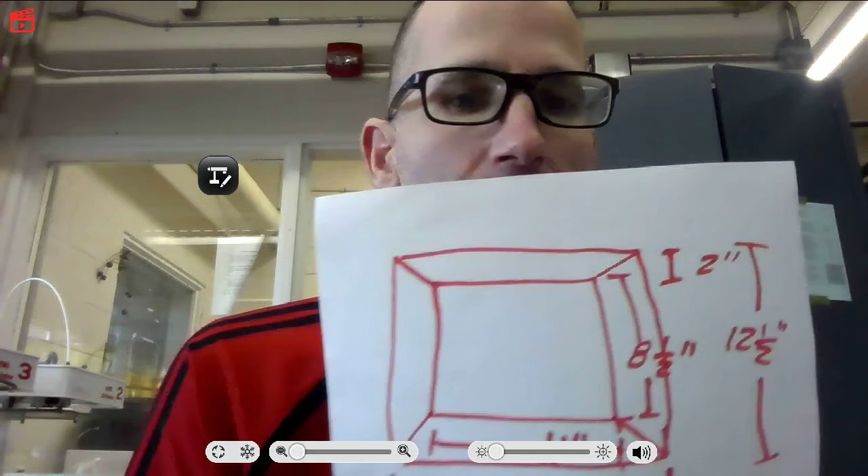Now, this picture shows you the side view of the little boards that we're going to use, and it gives you a cutout, and I want you to do that as well and show each one of these. I'll do that at the end and hold it up again for you to see, but for now, let's get to SketchUp.

Now I'm going to change my screen because I know how to do this. There we go. Cool. And I can move this somehow - oh yes, just like that. Put it over there. Okay. Oh, not that. Click, click. I don't know why this is fuzzy. It is always fuzzy. I am using HDMI, but for some reason it still isn't a good quality picture. I'm very sorry. So here we go, SketchUp.

SketchUp - once you start writing it, it does show up. You don't really need to go to SketchUp Free specifically, you can just use SketchUp. It is owned by Trimble. It is completely free. Now you go down here to SketchUp Free.

So you can see where my mouse is - I know it's hard to see. Click. Now you're going to go to Start Modeling. For me, I already have an account that I've set up with my Google email. If you've never used SketchUp before, you will have to put your email in there, and it is totally safe, it's just another extension of your Google email. So here we go, Start Modeling.

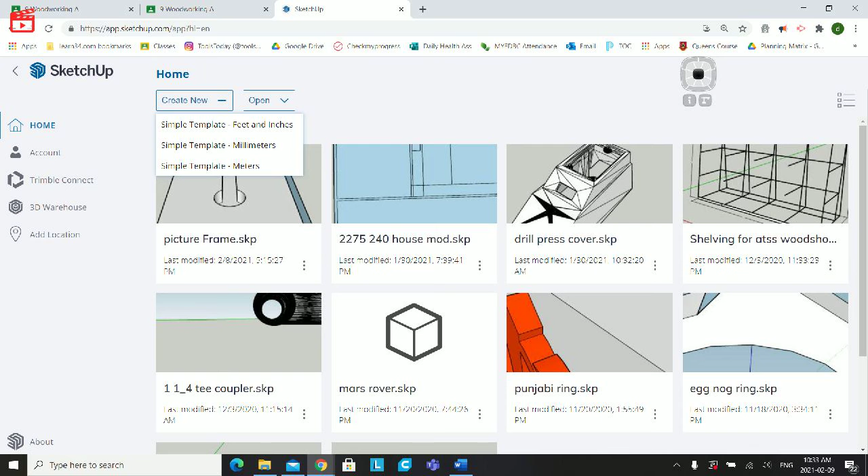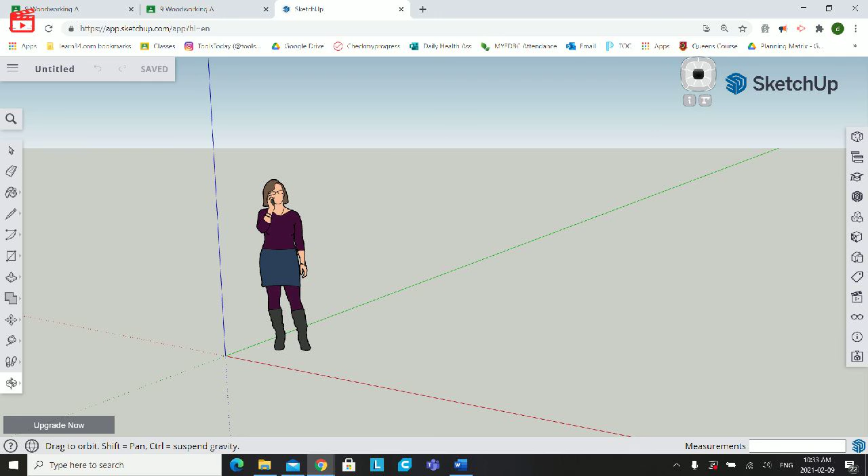All right, now we see this lady standing here. She is basically two-dimensional, but it's kind of hard to go around her because she keeps facing you. But anyway, she's unimportant really. You do sometimes like to have her in the picture though, because if you're building a house, you can see how big the house is compared to her. In our case, a picture frame is something that's relatively small, so you're going to zoom in using your mouse - you're going to use your finger and just roll in and out. So you can practice doing that now with your wheel on your mouse.

Now what I'm going to do is mess around with a few different things just so you can figure out how the options work. First off, orbit - orbit is accessed by using the letter O on your keyboard. You basically just press O and then it switches to orbit. When you're on orbit, you can press with your left mouse button, and then you can roll around and see under things, see over things, and just move them around. If you need to, you can click and roll every time, and that will allow you to roll around as well.

Now I'm going to go to just the pointer so it makes it easier for you to see what I'm pointing at. This is also a selector. This right here, we talked about this in class, is referred to as the origin. Blue is your origin - it's your Z, or your Zed if you're from Canada.

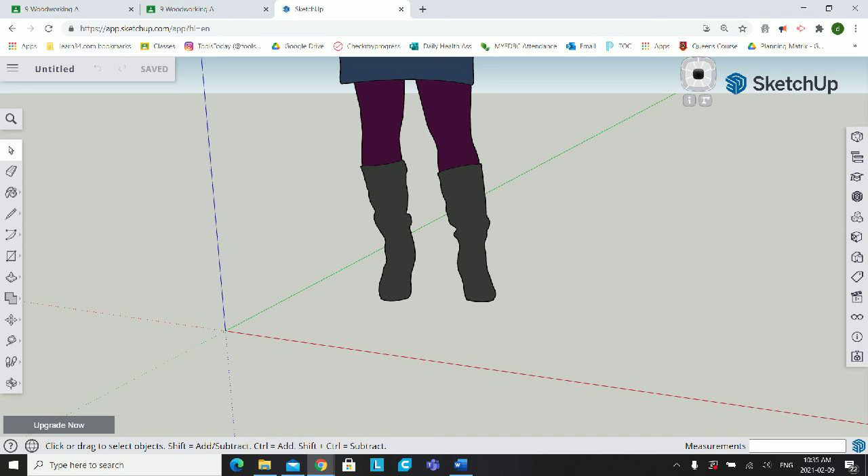So Z is your up and down. Then you've got your green and your red, which are basically your X or Y axes. Origin refers to the fact that everything meets at that one point where the blue, the green, and the red come together, and that is 0, 0, 0. So this would be +1, +2, +3 z going up, and -2, -3 and so on going down. Everything starts at 0.

Right now I'm going to make my picture frame, and I want to make it a rectangle or a square. So I'm going to click on the rectangle tool. It gives you the ability to do a few different things. You can make circles, polygons, which have multiple sides, like hexagons and octagons, and you also have a text tool for 3D text. For our purposes, we're only going to use the rectangle tool right now.

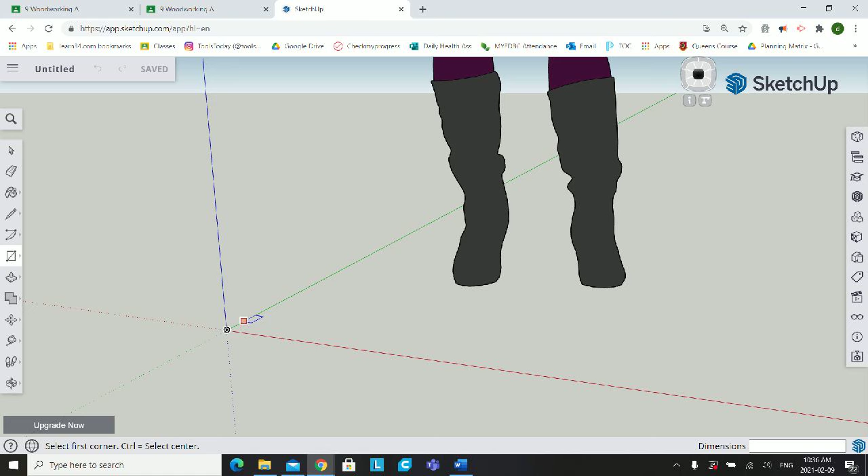Now I go over here. You can start right at the origin if you want, and you'll notice that your pen snaps to that point as you go down. You see how that little gray or black dot with a dot in the middle arrives? So if you want, you can create your origin that way.

Now the interesting thing about this — let me back up — is that wherever you want to make your rectangle, you click, meaning you press the button and let go right away. So click, and my finger is off the button, but it's still pulling out. The thing that's hard for people sometimes is not keeping their finger depressed on the mouse, but you don't want to, because you'll need it to type in the size you want.

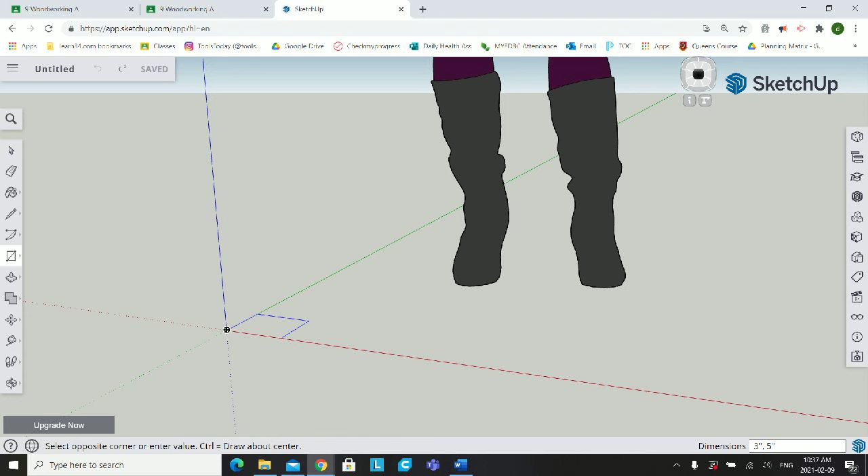Let's say I already drew my picture and know what I want to frame. I'll do a tiny one — 3 inches by 5 inches. If it's 3 by 5, I'll go down and look at my dimensions, but I can't really get 3 by 5 easily since there are fractions in there. So all I need to do is type 3 inches, comma, space, 5 inches, and hit enter. And that, my friends, is actually 3 by 5 inches.

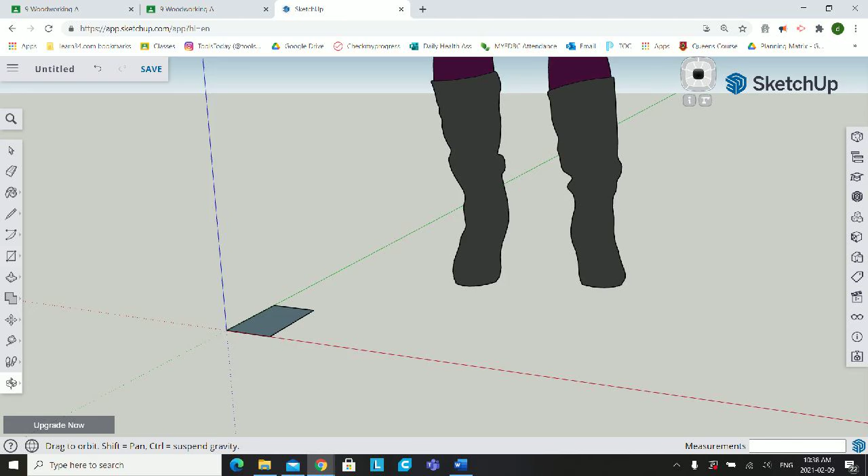I mentioned earlier there was another way to access the orbit, and thanks to one of the students — I can't remember who — you actually use the rolling mouse button, press that, and it works. So no matter what function you're in, press the rolling mouse button and it goes into orbit, which is wonderful.

So now, like I said, I've got 3 inches by 5 inches, and if I wanted to check that, I can go down to the tape measure function. Click on it, go to this little dot, press the button without holding it, go to the other corner, and look at the bottom right-hand side of the screen — it says length 5 inches. Then hit escape. You can check the other side too, top to bottom, and it says 3 inches. Hit escape again.

Now what I'm going to do is — this is where my picture is, but I want my frame on the outside. So I'll go to my push-pull function, click on it, then go to the offset function. When I click on that and click on the edge of this item, it gives me the ability to offset, pulling it away or in, to get my frame size. For now, I want to offset by, let's say, 3 inches. I'll pull this out, and I can go as far as I want.

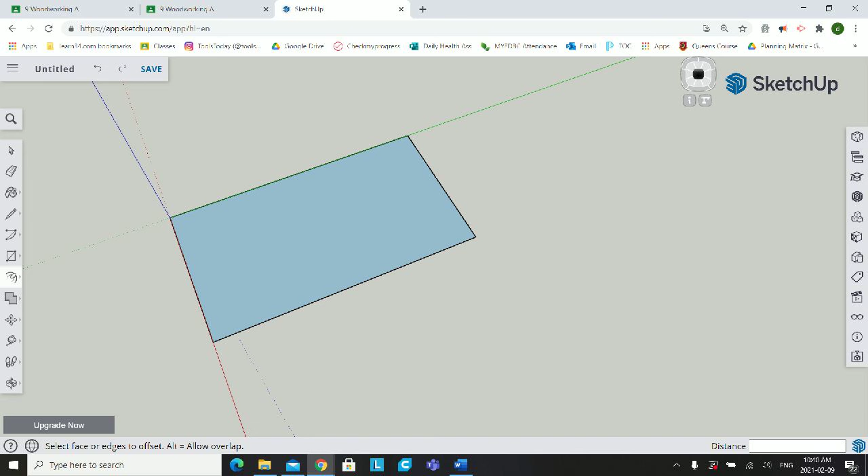So I'm going to do offset again, go edge, and go out. I think I'm going to try 2 inches. See how that looks. Enter. That looks better. I like that.

Okay, now I am going to go over here to my push-pull function again. I'm going to hit offset, and then I get push-pull. You can get to push-pull by pressing P. For now, though, I'm going to go right into this toolbox and use push-pull.

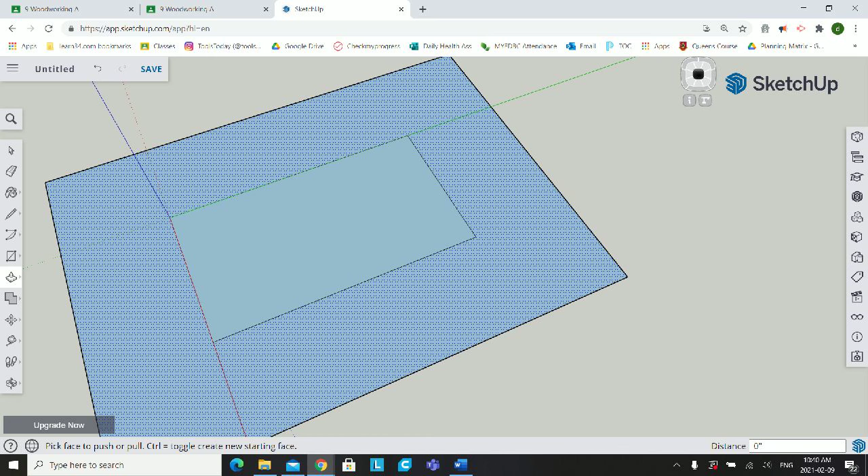What I want to figure out here is how thick I want my frame. Let me just go to orbit really quick and I'll show you. This thing has no depth whatsoever. It's basically 2-dimensional. I need to make it 3-dimensional.

So if I go to my push-pull, grab on here, and then I can raise it. I can make my frame as thick as I want or as thin as I want.

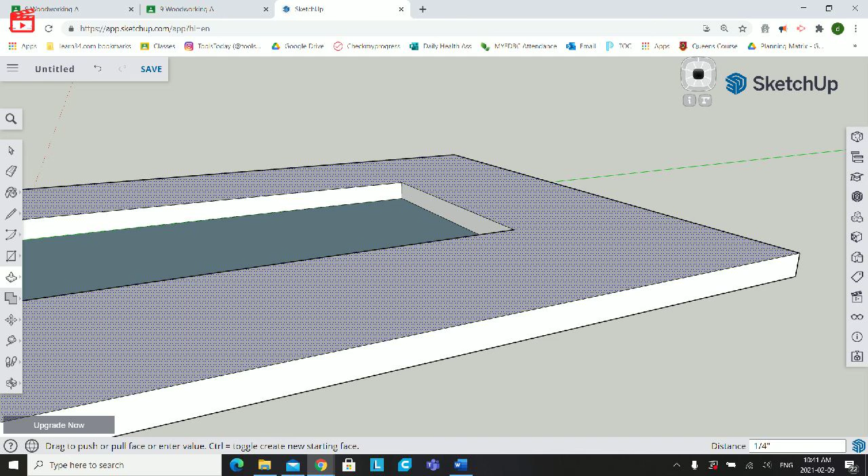But I have to keep in mind that I am going to use some plexiglass as the cover for my picture, and that is going to require a little bit of room. I'm also going to have to have a little bit of space for my picture, and recess and inset all that. So I think I'm going to give it, let's say, 1 inch of depth.

Now let's go a little bit less. I'll go 7/8 inch. Cool. Now I'll hit orbit, O, and I'm going to move around. All right, well, this looks all right.

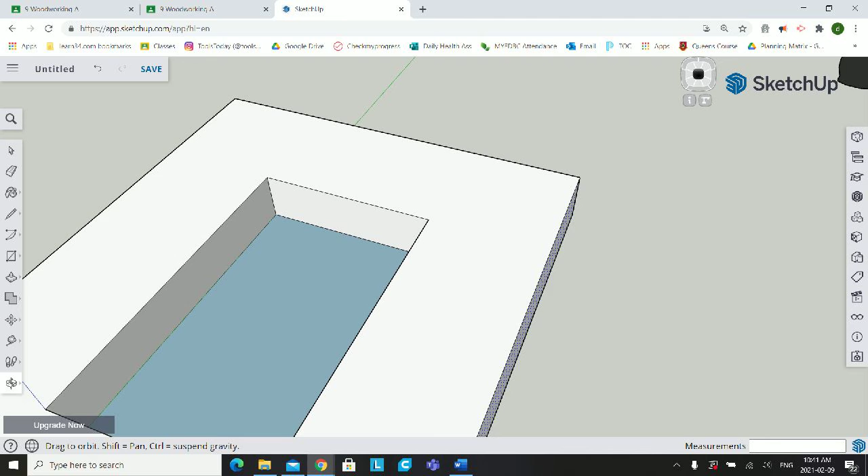Now what I want to do is, my little picture is this size exactly, so I need it to not be exact. I need it actually to be smaller than my picture so that my picture can drop in. So I'm going to offset it by 1/4 inch.

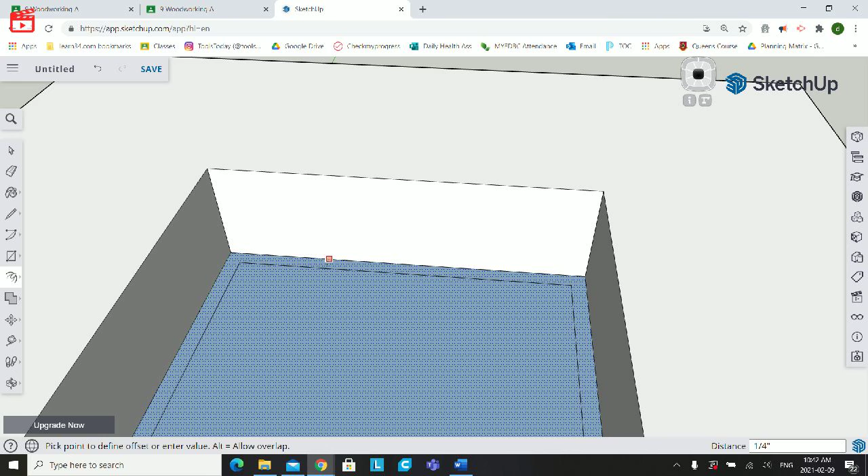So I go to my offset again, offset. I'm going to click this inside line, this inside edge, and offset it, like that. I'm going to go by 1/4 inch, I think that's perfect. So 1/4 inch, perfect. Now I'm going to use my push-pull again.

Where am I? Push-pull, and I'm going to drag this. Oh, that didn't work. Escape, and push-pull right here, and I'm going to bring this up. I think I can bring it up, maybe, let's say, I don't know, I could do 1/4. Yeah, 1/4 might work just fine.

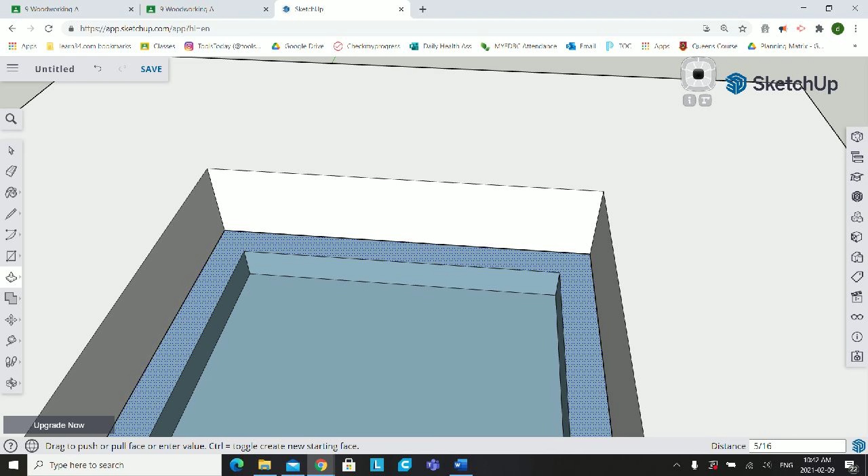I like it. Actually, I'm going to go 5/16 just for kicks, which is a little more than 1/4. All right, now let's do orbit again. So now you can see that I've got, from the back here.

This is the back. You could drop in your picture, and then you could drop in another piece of wood that you'll require, or you drop in your plexiglass, then you drop in your picture, and then you'd put a piece of cardboard or whatever on the back, and then you'd stick these staples in, all the way along to basically hold your picture in.

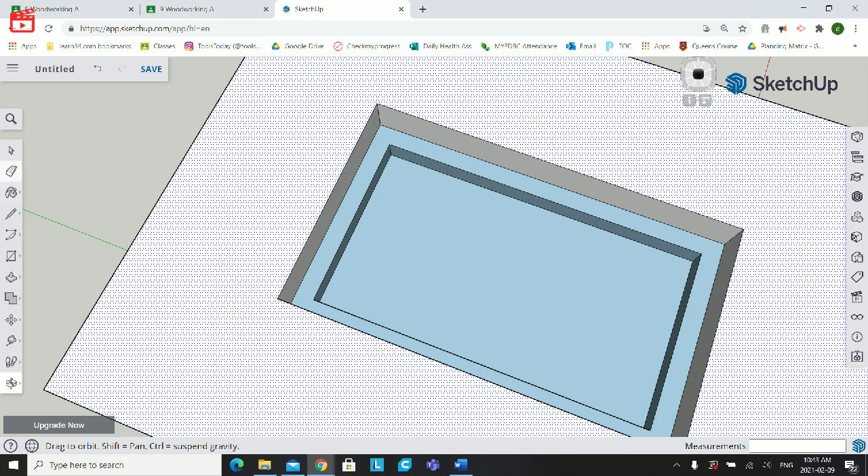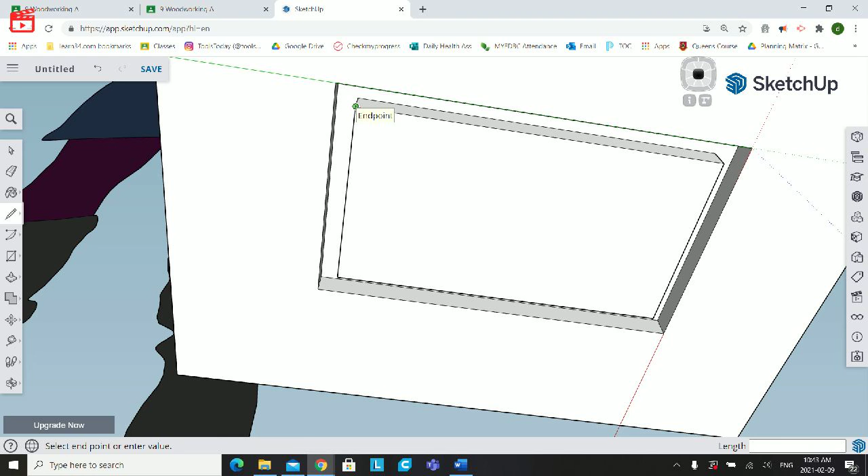So what I'm going to do here is grab my little pencil, and go from the corner right up to the corner. I'm going to go escape. I'm going to go corner to corner, and then I hit escape.

So what I'm going to do, I'm going to go to my pointer selector again. I'm going to click on the middle, and I'm going to delete it. Then I'm going to click on all these lines. Ooh, not that one. You can always hit the back button right here when you mess up, and it will take away what you just did.

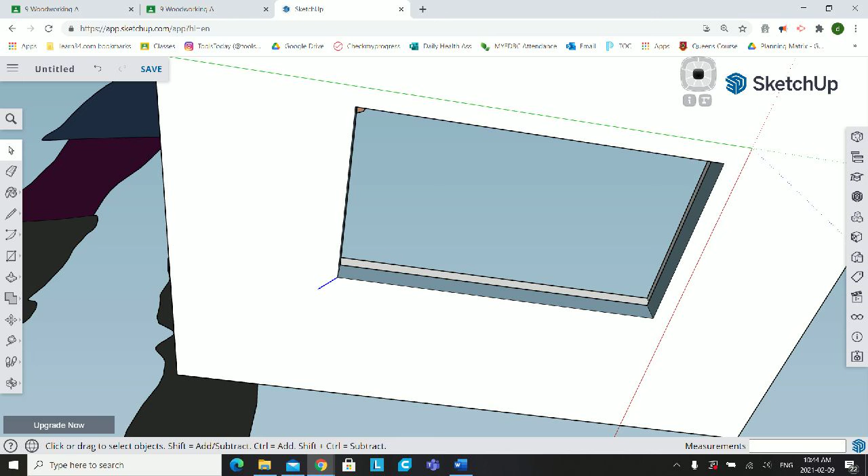I should have music while I'm doing this for you guys, or for me.

Okay, so there you go. Now I'm going to want to put a couple more things in here. So let's flip it around. So you see I got my glass that can go in there, my picture that can go in there. I can put that little piece of cardboard. I can put the pins in.

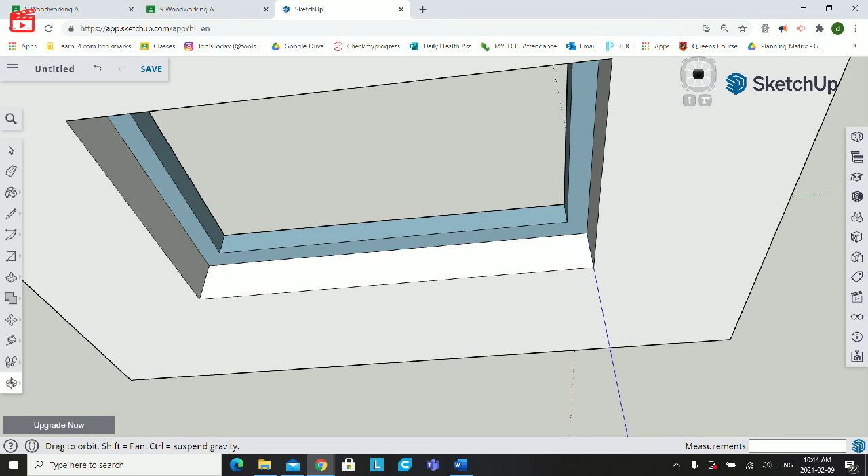But actually, Mr. Spears, I thought we were doing miter cuts. And a miter cut is, in our case, a 45-degree cut. You are right. So I'm going to take my pencil, and I'm going to draw these miters in.

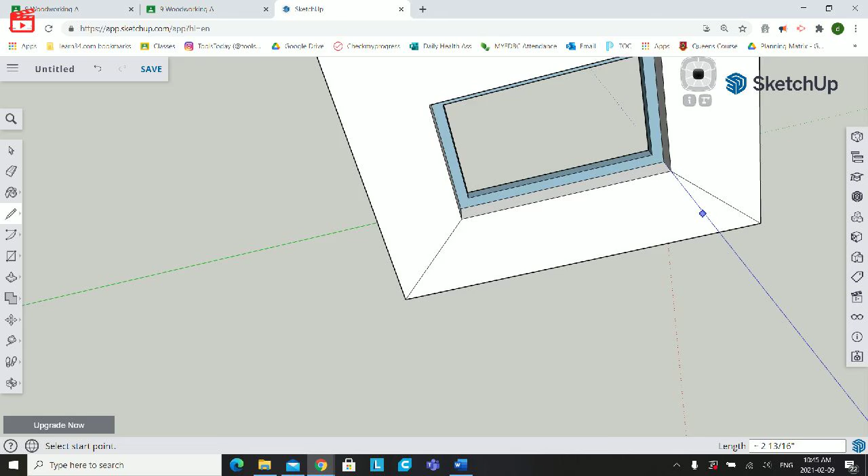And back up right to there. Escape. You notice when I'm doing my drawing, it snaps to that spot, which is so nice. It goes right to that middle point. There isn't a whole lot of messing around that I have to do.

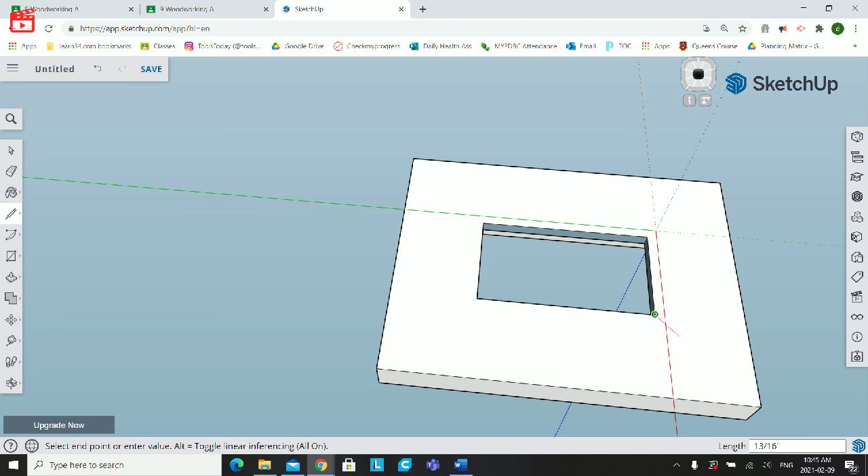Now I'm going to draw the miters on this side. L for line. Okay, hit orbit. Here we go. And there you have your miter box picture frame.

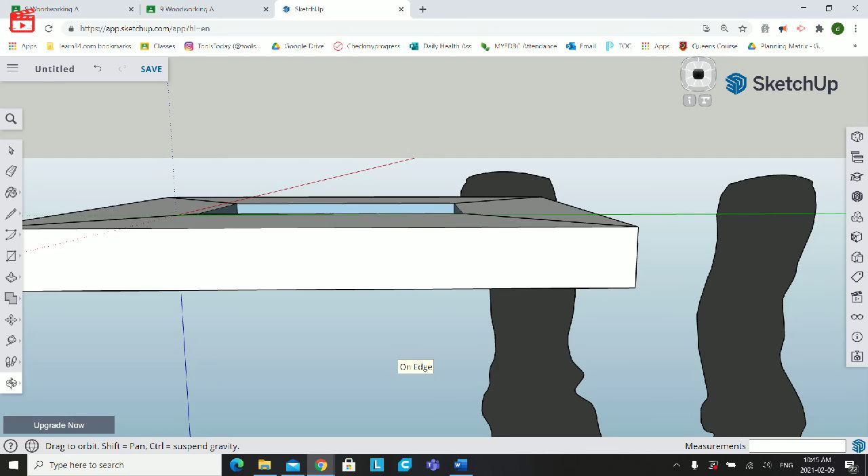I haven't done any dimensions, and I also haven't done the splines. I mentioned splines in the last class. The splines, I'll show you. I'm going to do a spline right here. A spline is basically kind of a funky wood piece that we put in the corner of our frame to make it nice and strong. So I'm going to go right here and grab my pen again.

If I go to the middle of any line, it'll snap to a blue circle, and that blue circle is the midpoint. In fact, it says the word midpoint. So I'm going to click on there, and then I'm going to go this direction.

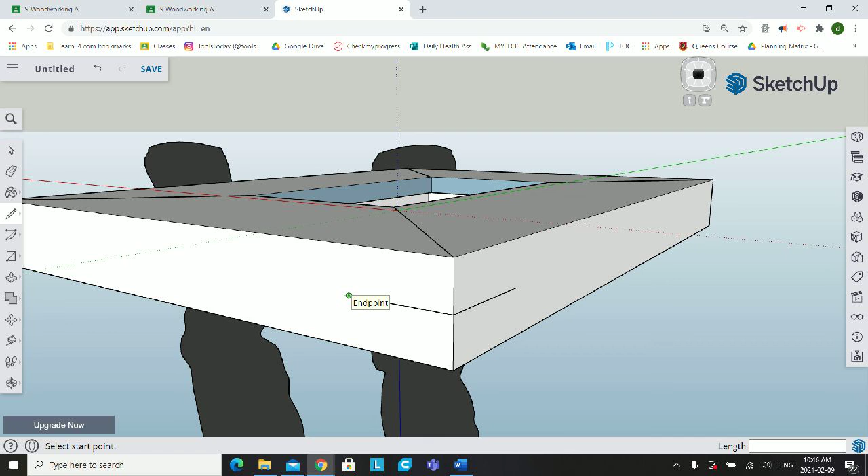I think I'm going to make my splines, let's make them 1 inch. That's totally fine. So 1, enter, then I'll hit escape, go to here, and I'll go 1 again, 1 inch, escape. And then I'm going to make these splines a quarter. So that means each one is going to be 1/8. So I go to here, 1/8, to here, 1/8.

Now, some of you are wondering, I thought you said a quarter, how come you're making it 1/8? Well, because I want my spline to be in the middle of this corner, and I want it to be 1/4. So I went to the middle, then 1/8 up, 1/8 down, which adds up to 1/4. Then I can go to my selector again, and I can delete this.

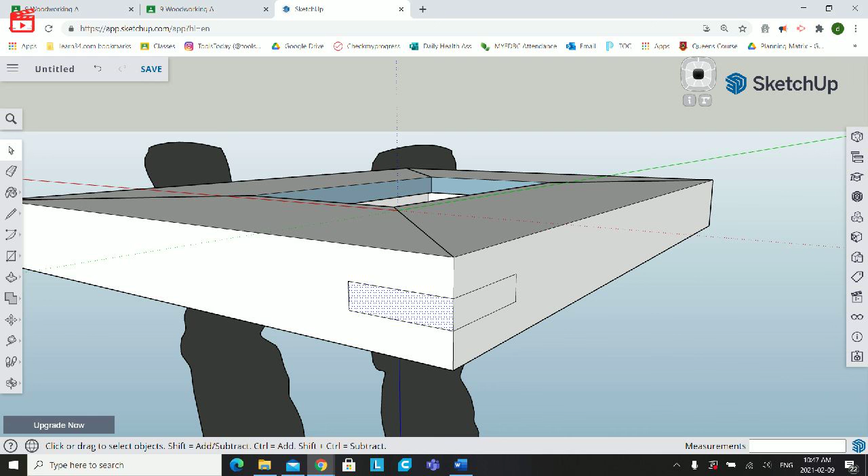A kind of neat thing, if you wanted to do this, is you can click on this and you can paint. You can paint these different colors, make things a different color. I believe your paint is... so I can choose different materials. I can make it like brick, or wood, or all sorts of different things. But I'll let you guys play around with this.

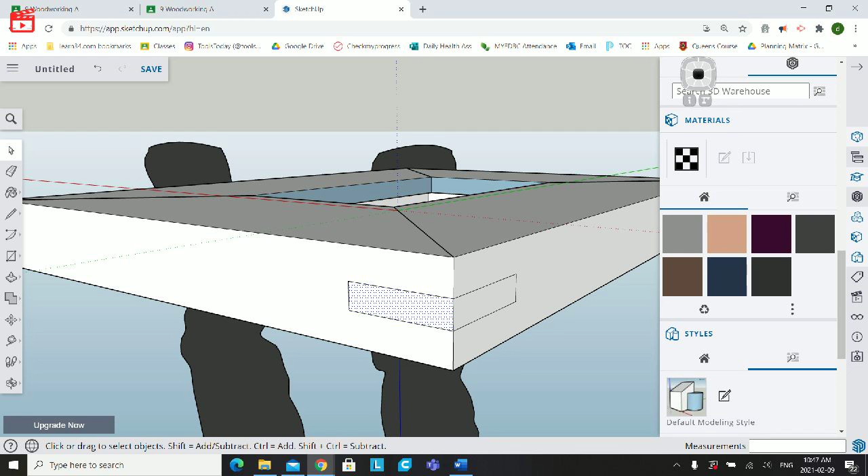Here we go, there's some colors. Let's get rid of that. So I don't know, I'll just do this. It's purple. Orbit. Oh nope, I don't want that. Erase. Orbit. Okay, so there you go. So there's my spline. That's kind of funky.

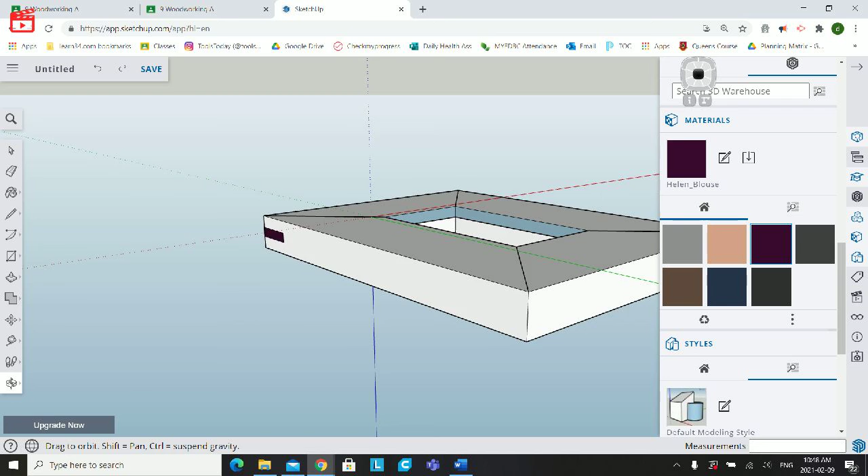There is actually a purple wood. It's called Purple Heart, and it's beautiful, and I do have some. I may even do that. If you guys really want purple splines, I will crack out the Purple Heart.

Okay, let's get our line again. Let me go to there. I'm going to go 1 inch, 1 inch, enter, and escape, 1 inch. Then I'm going to go up 1/8. And I'm going to do this all the way around.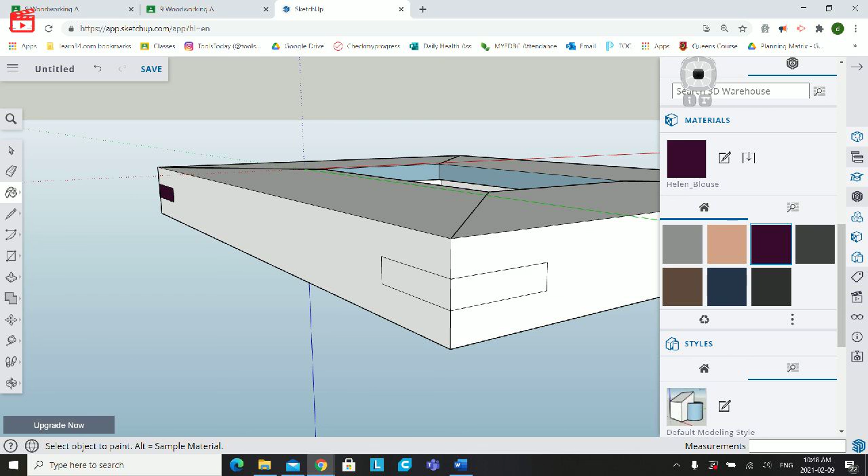I don't actually need to redraw this every time. There's actually a way where you can copy it and then move it around to the other side. But just so as not to confuse anybody, I'll show you how you draw it each time here. Okay, and then orbit, and I move around, and I'm just about done, except for, of course, my dimensioning, which I'll explain how that works in just a moment. So if you want to fast forward this while I draw this in, you're more than welcome to, because it's kind of annoying to watch, maybe.

Almost done. Almost done.

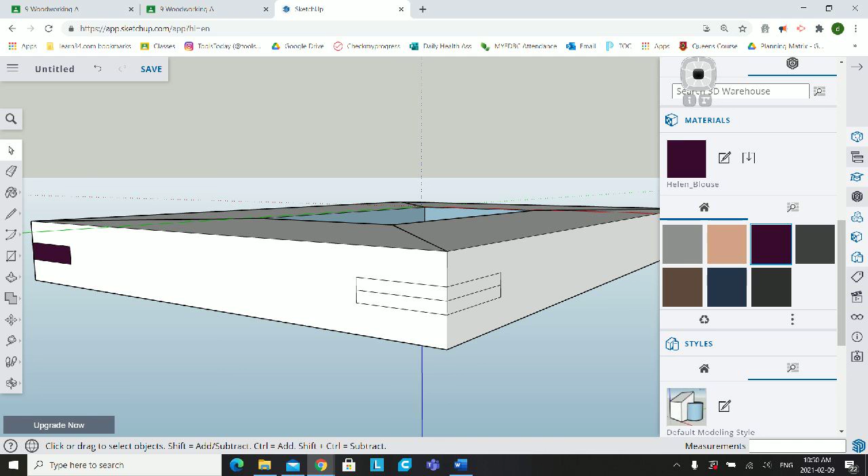Get rid of that, and make this purple, and orbit.

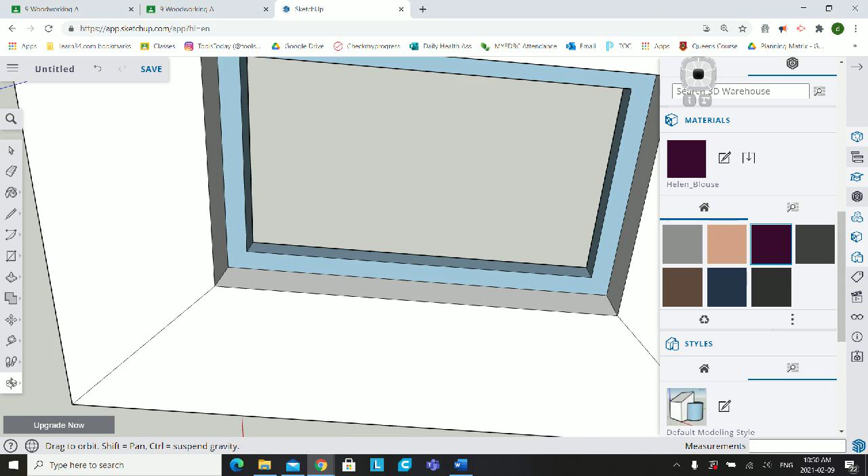Okay, now I want to put the hanger on the back, because I'm going to have to hang my picture obviously when I'm done. So I'm going to go to the back side, and you know the back side is this side because this is the side the picture and the plastic would go into. What you're also going to want to do is list the size of the acrylic plastic you require, because you will have to cut that and drop it in when you do your piece. So right here, I want to make my little spot where I'm going to hang this bad boy.

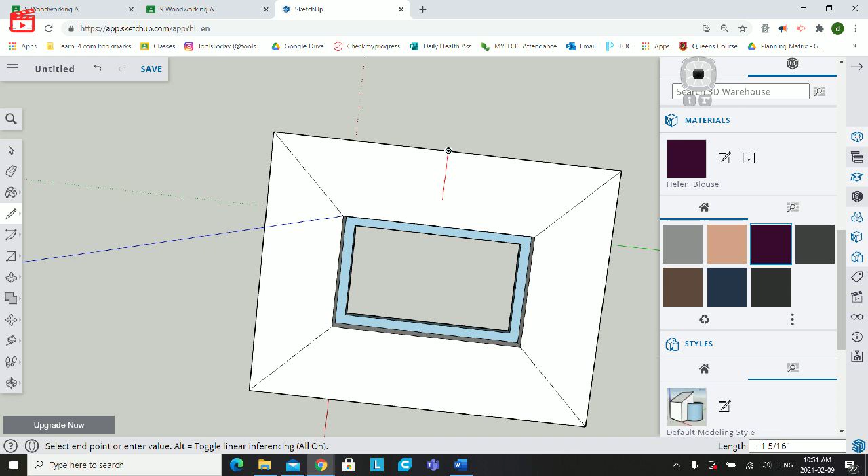So what that means is I want to find center. So I take my pencil, I go along here, and look, it snaps. So take and draw a line from midpoint to midpoint. Don't worry, you're going to take this line out later.